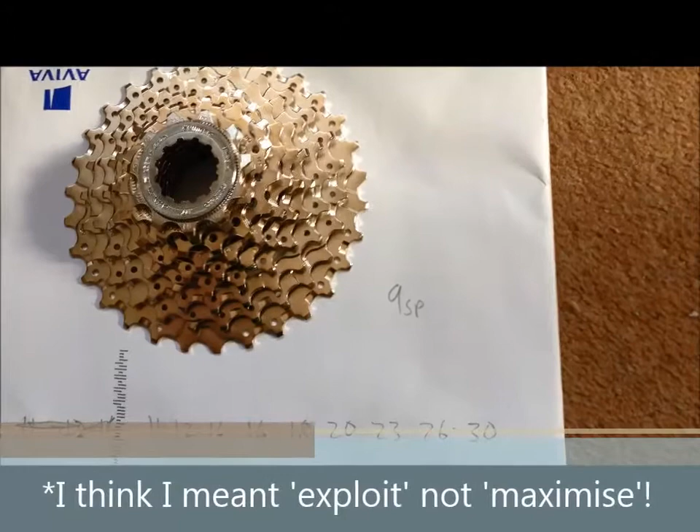Okay, so this is the latest project I found to take up my precious time with. I've been after a new 9-speed cassette for my touring bike, and what I want to do is sort of exploit the gear capacity of the mech, and the difference in chainring size at the front only leaves me with about a 21 tooth difference at the back to work with. This is due to the limitations of the derailleur, if you like. I don't want to get into buying a whole new derailleur and all that kind of stuff.

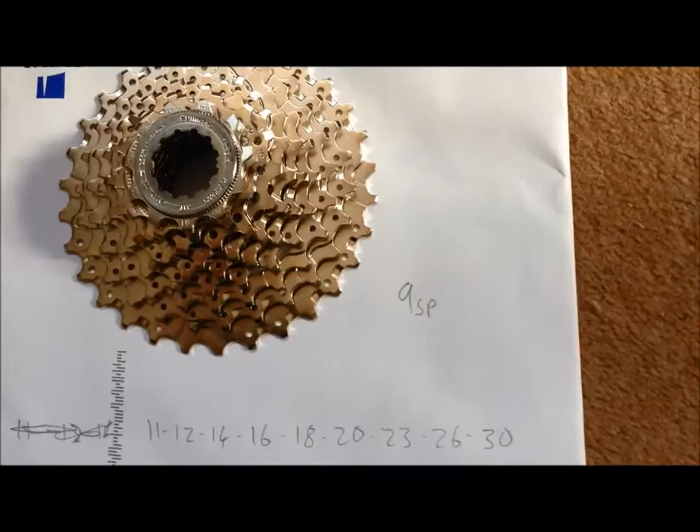So what I've actually been after is a 13 to 34 9-speed cassette, and surprise surprise, nobody does one as far as I know. So what I decided to do instead is the time-honored old method of customizing one by swapping a few cogs around. So what you can see here is a 9-speed 11 to 30 I've got from a popular online retailer.

If my local bike shop's watching, I had a gift token, okay?

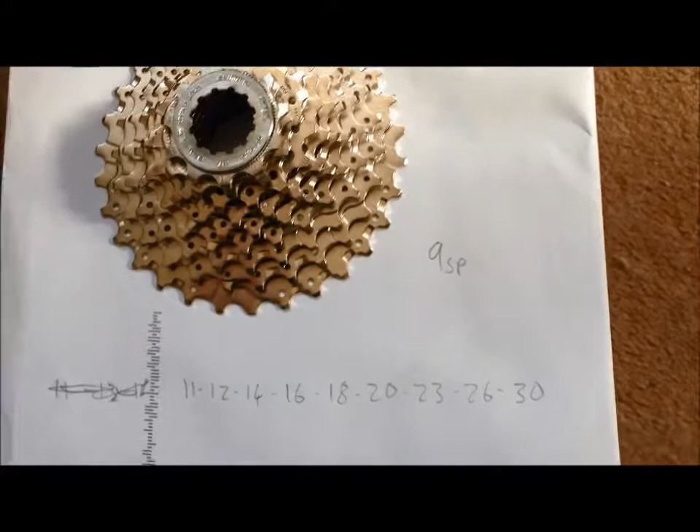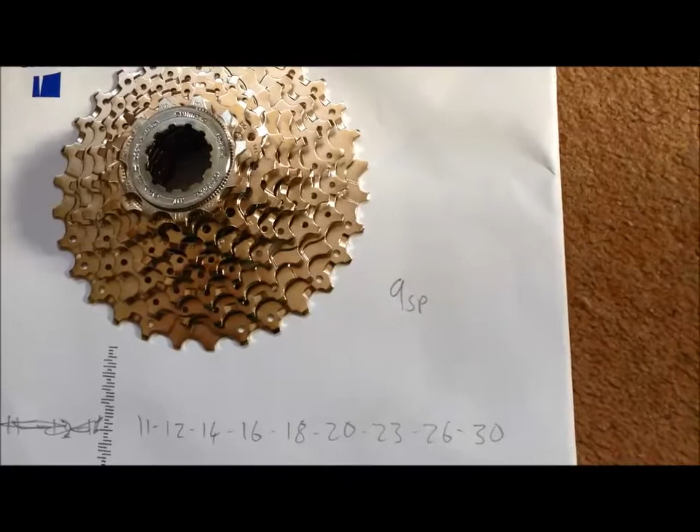So what I want to do with this is take off the top two. You can see there at the bottom of the screen it says 11, 12, 14, etc. So I want to take off the 11 and 12 and stick a 13 top cog on there. And if you're mathematically minded, you'll realise that only leaves me with 8 speeds. And what I then want to do is take a 34 bottom cog and stick that on the bottom.

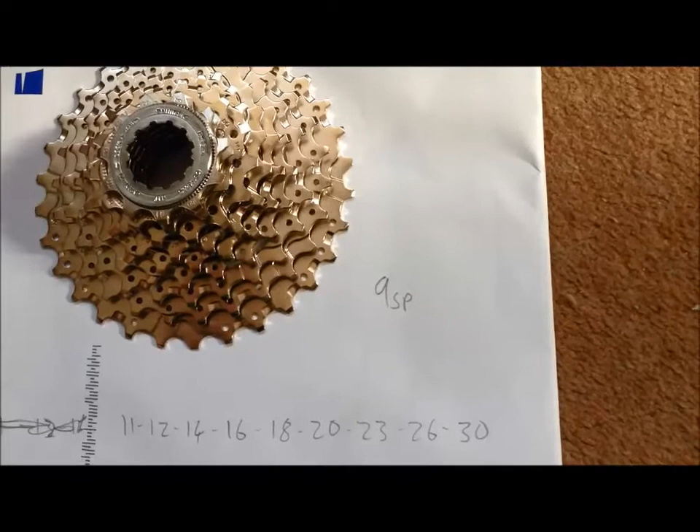Now, I know you're going to start shouting, you can't use 8-speed cogs. I'm only going to use the bottom one. It's about 0.2 of a mil thicker, I think. So I think I'll get away with it. Obviously you can't run 8-speed spacings on 9-speed. You can't really mix them. But for a single cog, I'm going to try and get away with it.

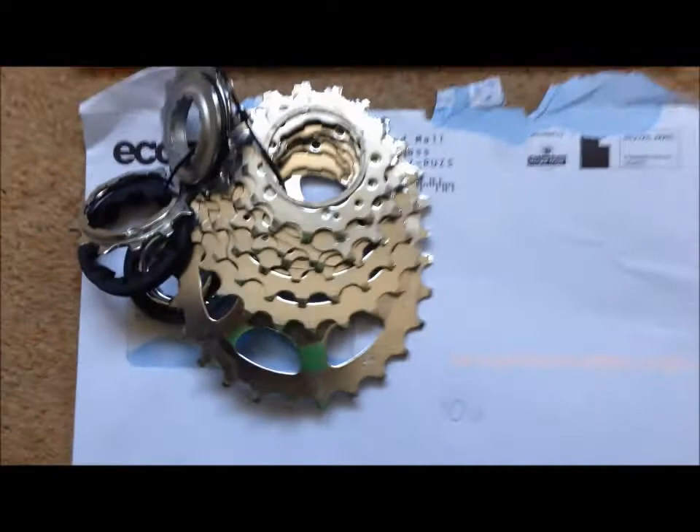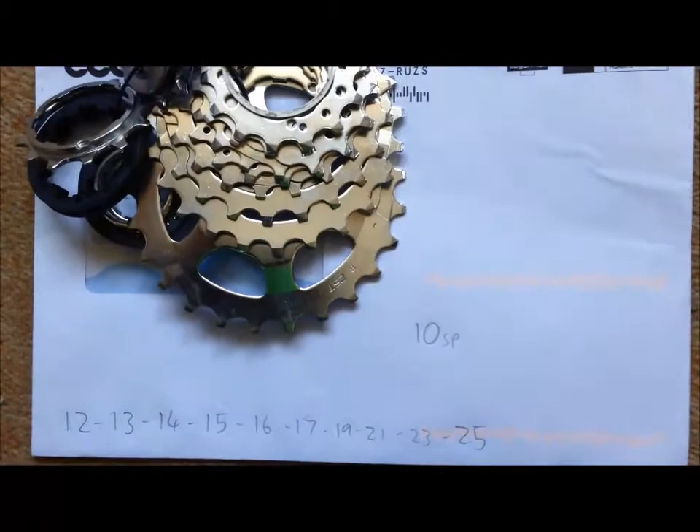I've got another cassette here, which is another sort of donor part-use cassette. And notice that's a 10-speed, so I really am going for the mix and match approach here, but all I want off that really is the 13 tooth, and you notice that's not actually the top cog, that's the second from top cog.

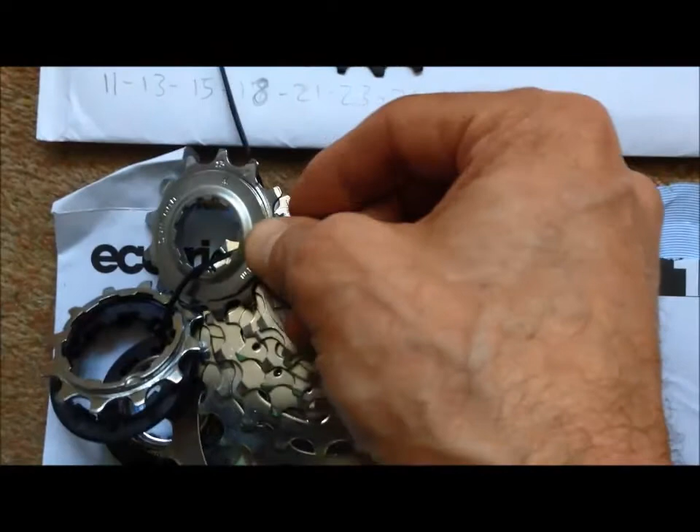And what I've got there is actually a lock ring from a centre lock disc brake. Apparently they're the same size, and I'm going to go with that. That is the right size for the 13. You can't use a lock ring off an 11 tooth on a 13 because it just falls through the middle.

So the next step is to drill through these pesky rivets that are holding the thing together. And once you've done that, all the cogs fall apart. Those rivets don't actually make any difference in service. They're just there to hold the thing together for assembly and presentation in the shop, I guess. You can run the cassette without having those rivets in. So I'm going to drill them out, and then rearrange all my cogs into the cassette that I wanted.

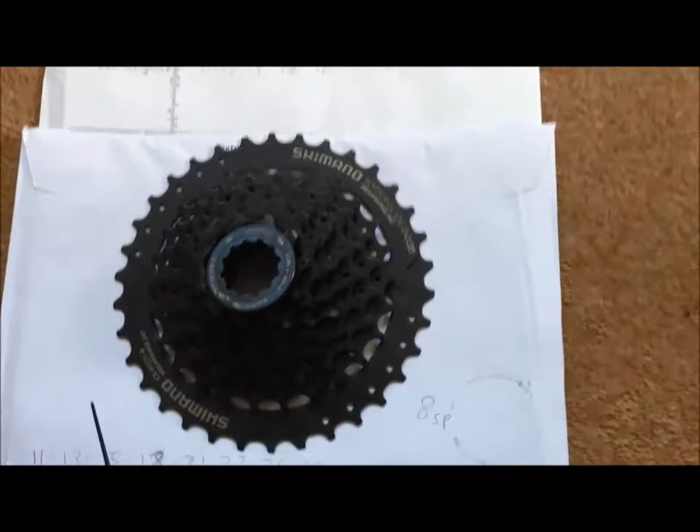I've got to emphasise that obviously if I had been able to find one of these, it's easier just to go and pay somebody 25 quid, 30 quid or whatever, but that size just doesn't appear to exist, so hence all this messing about.

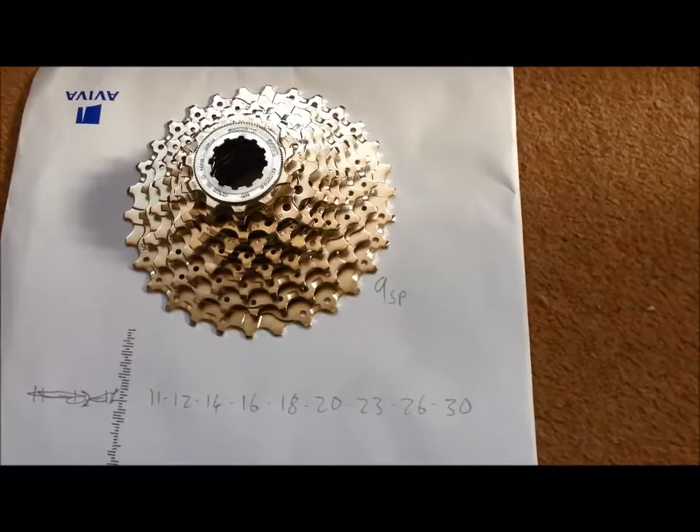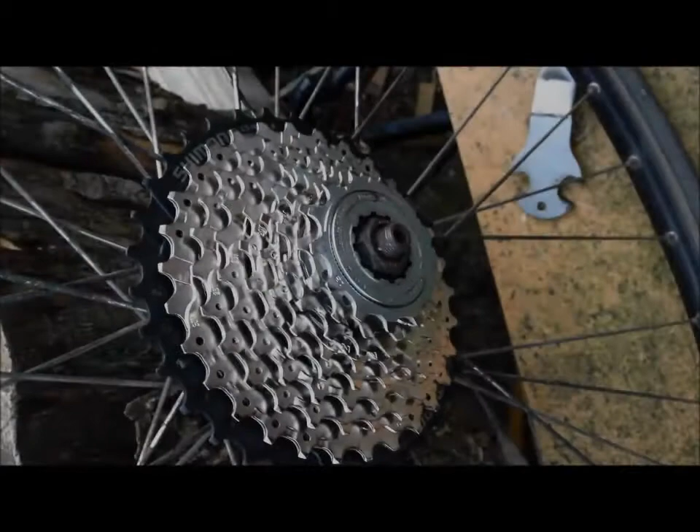So here's the finished article. You can see top cog 13 tooth there, 13, 14, 15, 16, 18, 20, 23, 26, 30 and 34. That's that big mega range cog on the bottom there, and I'm sure I'll come to appreciate that sooner or later. There you go.